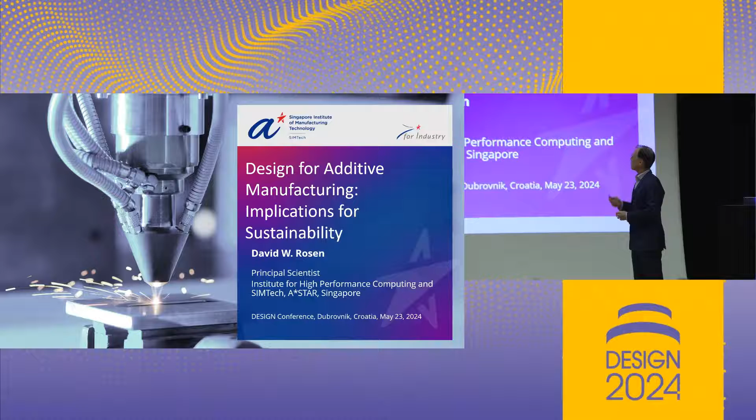As Professor Wartzack said, I'm actually in Singapore. Well, I'll get to that in a minute. And yes, I spent most of my career as a mechanical engineering professor at Georgia Tech.

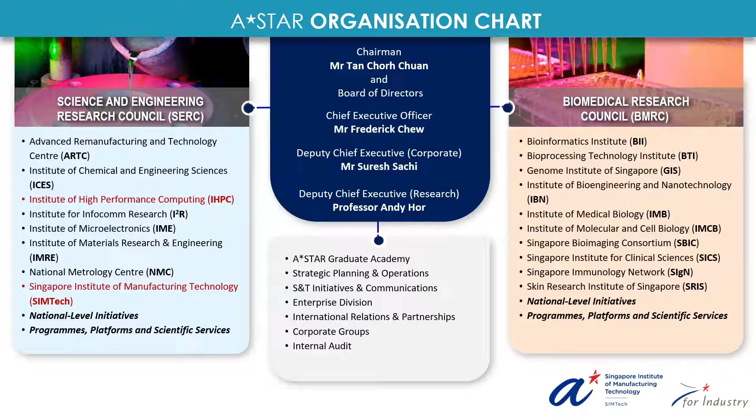So a little bit of background on what is this Singapore A-Star thing. A-Star is the Agency for Science, Technology, and Research. It's basically the national labs of Singapore. So it's very broad - Science and Engineering Research Council, Biomedical Research Council. Just to give you a little perspective, there's about 5.5 million people in Singapore, a fairly small island, and there's about 4,500 technical people that work at A-Star.

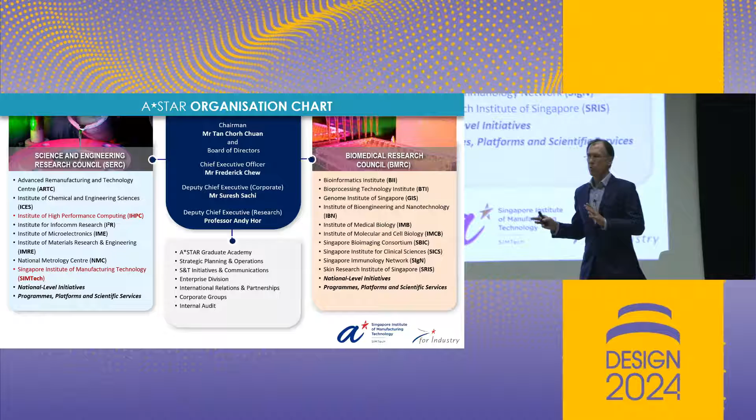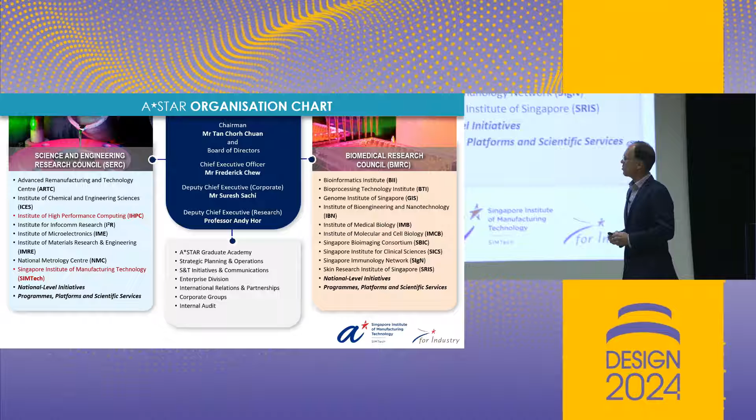So in Singapore, they take research very, very seriously, and there's lots of support. I'm part of 2 of the 18 institutes in A-Star, IHPC and SimTech. There's roughly 450 or so technical people in each of those.

So what I'll talk about today is design for additive manufacturing. It's great to see several sessions here at the conference on design for additive. Last time I attended the design conference physically in 2018, I'm not sure that there were any. There's really good growth and interest in this topic. The other topic that's really grown a lot here at the conference is AI and large language models, but I will not mention either of those topics in the rest of my talk.

So we'll talk about design for additive, give a bit of an introduction. We'll expand that to the process chain. Then I want to tie a lot of this design for additive stuff to sustainability, that's one of the themes of the conference. And then, time permitting, I'll say a few words about product architecture, design, and 4D printing.

Just to provide a good foundation for everyone - additive manufacturing or 3D printing represents a class of 7 categories of processes. They're all listed here, I won't go through them in detail, but they're all based upon the principle of layer-wise adding and processing material to build up parts. They all share that characteristic. They vary in terms of the material type, how the material is processed, and things like that. But broadly, that is the class of processes.

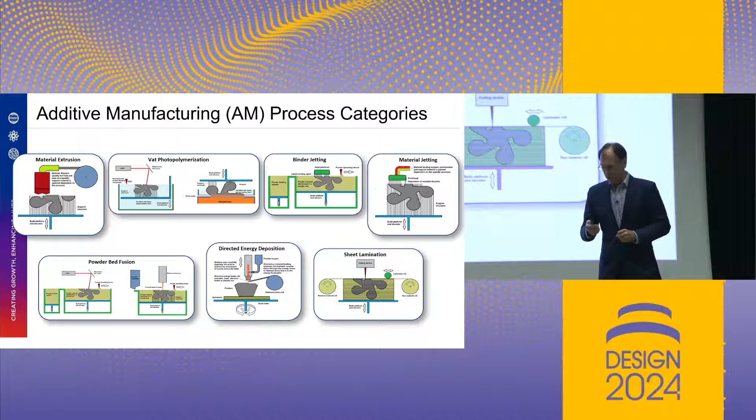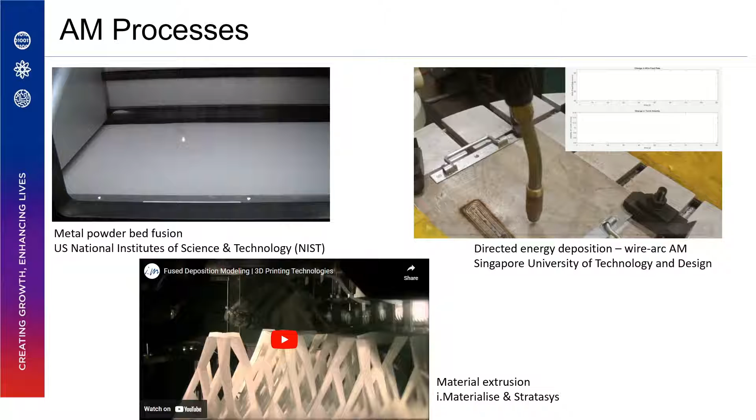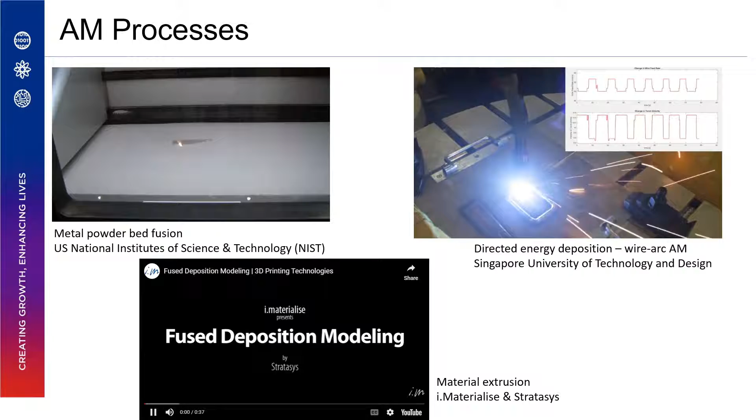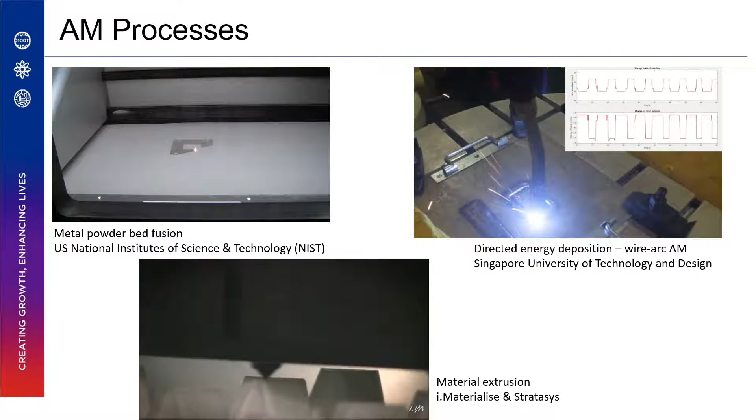Just to provide a little bit more grounding, I've got videos of 3 different processes here: metal powder bed fusion up there, and let me see if I can start these other ones. Metal directed energy deposition up here uses essentially a welding head on a robot arm. And then what many of you know as 3D printing, or Stratasys' FDM, is the deposition of thermoplastic polymer filament, basically, to build up parts. So laser processing, thermal processing of polymers, and a variety of other kinds of approaches are used.

The thing that sets apart design for additive manufacturing from design for manufacturing is basically there's an opportunity to really make use of the unique characteristics of additive manufacturing in a way that's not so apparent with conventional manufacturing processes. I'll say a little bit more about that.

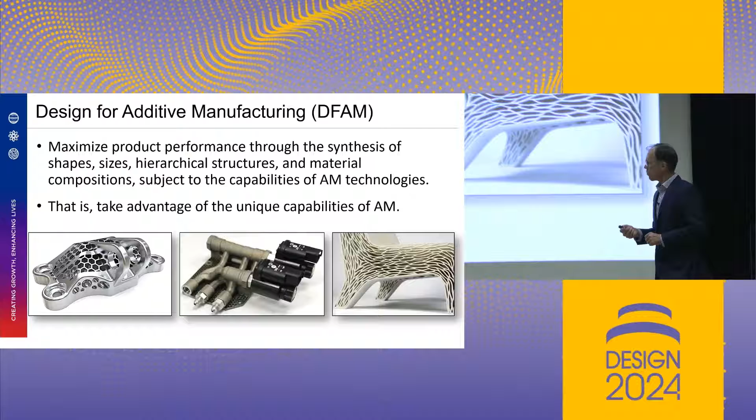My definition of design for additive is to try to maximize product performance through the synthesis of shapes, sizes, material composition, microstructures, and things like that—really take advantage of the unique capabilities of additive. Yes, we have to deal with the limitations of the processes, but let's really emphasize what the opportunities are.

What are the unique characteristics of additive? Well, they're listed here. Shape complexity is the most obvious one. If you're laser processing the material, the laser doesn't care how complicated the part cross-section is, it'll draw it. Likewise, if you're extruding thermoplastic filament, you can extrude it in virtually any shape that you want.

Material complexity—a lot of these processes will support multi-material processing, so parts can be made of more than one material, and we can also functionally grade materials or mechanical properties.

Hierarchical complexity basically means features can have features, so we can texture or put texture on surfaces, or we can have lattice structures composed of lattice structures and things like that.

And then functional complexity is the idea of building mechanisms or working devices right in the vat or in the machine, illustrated by this example, which is the elevator in a stereolithography machine, where there were about 6 or 7 different metal components that were inserted into the liquid resin vat, and the rest of the structure was built around them. Plus there are some kinematic joints here, so the elevator slides up and down on a couple of shafts, and there's other stuff we built in there.

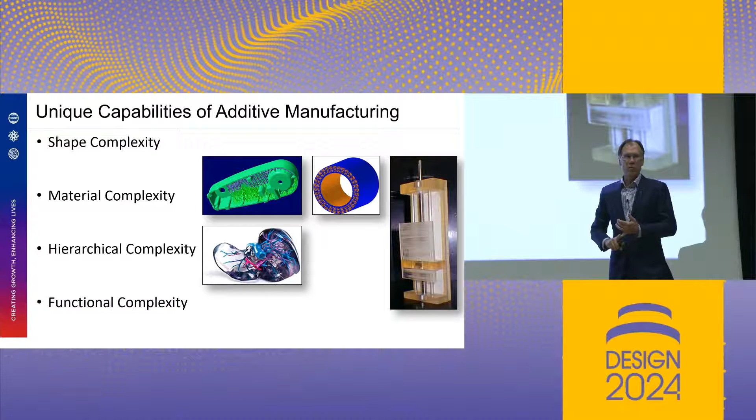But the point is simply that you can get working mechanisms if you can get the material out of the joints and support structure out of the joints, things like that. You can also embed, in some cases, motors, actuators, printed circuit boards, and things like that right into the machine and build around them to make functional devices.

People have been really creative about taking advantage of these unique capabilities to do really amazing things. I've got a mix of technical artifacts here, as well as some other non-technical things. The fashion industry, jewelry—people have been amazingly creative in what they've done.

The American football helmet shown here is a really good example of taking advantage of shape complexity capability to make custom designed parts. This is a spinal implant from Stryker, again taking advantage of shape complexity capability. Hearing aid shells, Invisalign aligners—custom designed devices where 1 million of those invisible aligners will be produced per month. You can't do that using other manufacturing processes.

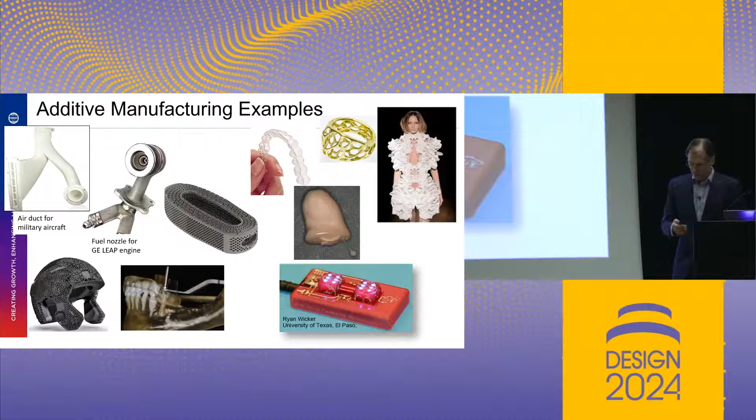So if we think a bit broadly and try to collect everything together, we can come to this distinction again between conventional design for manufacturing and design for additive. In conventional design for manufacturing, what that usually means is let's understand all the limitations of the manufacturing process and figure out how to design around them. And in that respect, what designers are doing is really tweaking, for the most part, details.

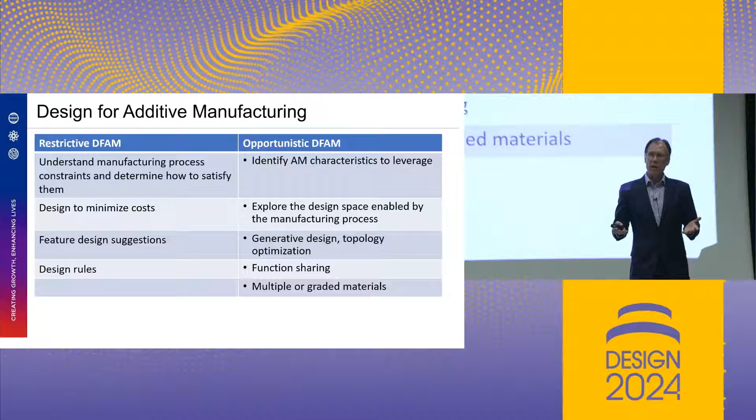Designing for injection molding—what draft angle should I use? What radius should I use on sharp corners to round the corners? Things like that, so design guidelines along those lines—do this, don't do that kind of design rules. And then there's also feature dimensioning sorts of design guidance. In other words, if you want to design snap fits, these are the kind of dimensions that you should use—again, focus mostly on the design details.

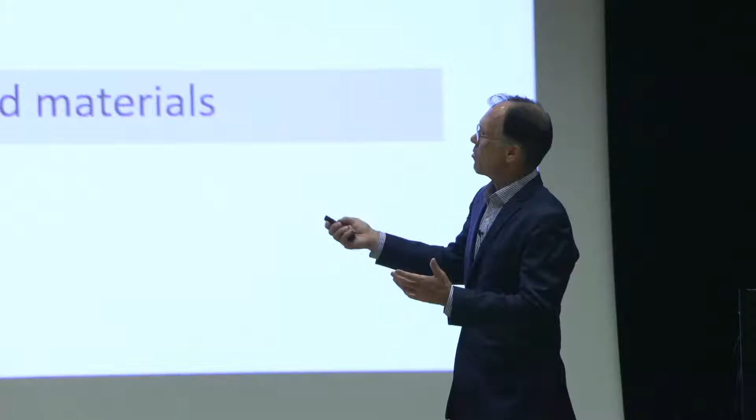That's what I call restrictive design for manufacturing, or design for additive manufacturing. The opportunistic design for additive is what I think is much more interesting and is really the distinguishing characteristic here. Because we have shape complexity, material complexity, functional complexity, etc., there's a lot of new things that we can do. And really the challenge for the designer is to figure out how to take advantage of these unique capabilities to solve their problem in ways that haven't been explored before.

I use this fuel manifold example from Olaf Diegel as an example. You don't get that design by tweaking the details on your conventional 'let me gun drill from a block of metal' kind of approach to a fuel manifold. This is a clean sheet design. You've got to think in terms of designing for additive to get that sort of a result, okay?

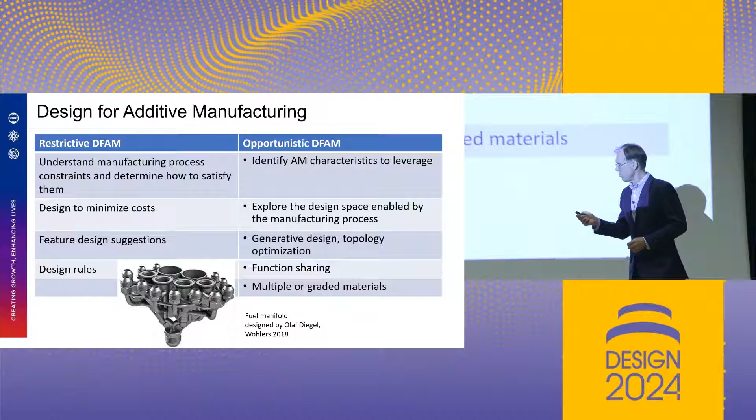In terms of the design opportunities, we can categorize them as complex geometry, custom geometry, multiple materials, and no tooling. And there's a number of consequences for each one of these things.

One of the big advantages that a lot of people talk about is part consolidation. So you can replace 4 or 5 injection molded components with one additive polymer component, or 10 metal parts that are welded and brazed together with one metal powder bed fusion part, things like that.

That's really important, but there's a lot of other advantages here. When we think about part consolidation, you're eliminating tooling. You don't have to design and fabricate tools like injection molds. You don't have assembly operations either, so you don't have to worry about assembly tooling. And if you are really effective, the performance of your integrated device can be a lot better than modules or components built of several different conventionally manufactured components.

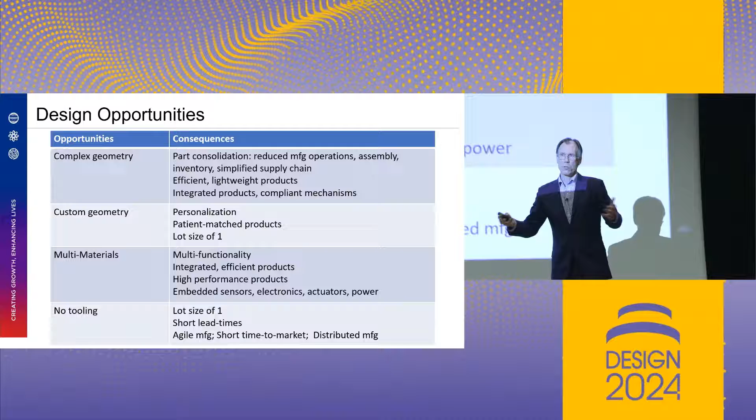Since no tooling is required, lot sizes of 1 are possible, with short lead times. Again, you don't design and manufacture tooling, but that also enables you to do distributed manufacturing. You're not reliant on a central facility where you've invested all that tooling, so you can manufacture locally, on street corners and things like that.

There's a lot of things I could have talked about, a lot of good research and results, but let me move on and say that design for the additive process itself is necessary, but not sufficient. Because most production parts are not the result of one manufacturing process. If you look at metal powder bed fusion, or metal additive manufacturing in general, there are a lot of additional steps. You really have to design for the entire manufacturing process chain, because your end result is the sum of all of these different pieces.

So with metal additive, typically you do a heat treatment of some kind, you've got to remove support structure, and you probably want to do some overall finishing, or at least finish machining of your important surfaces. The structure of that process chain is important — what processes are in it.

The sequencing is important as well, because there are implications for changing the order here. If you remove support structure before you heat treat, your part's probably going to deform a lot. If you heat treat right on the build plate without removing supports, you're probably going to maintain the desired shape a lot longer, get that stress relief, remove residual stresses, and get a better result. The point simply is that you've got to design the entire process chain and the part — they all have to be compatible.

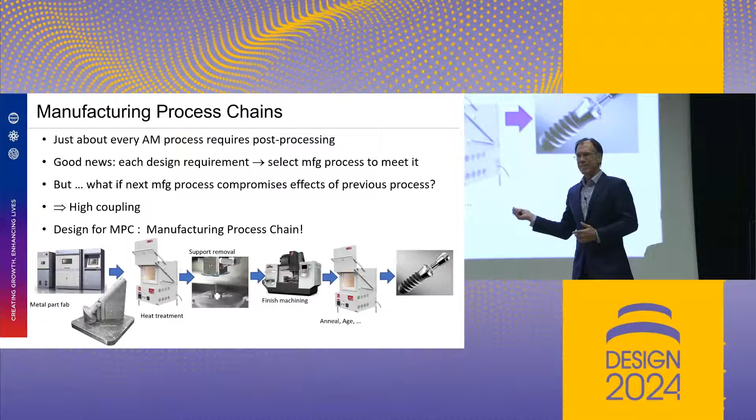That's a lot of work, but you also have incredible design freedoms in each step along the way. Just to illustrate that, this is a project that was actually done in one of my graduate classes at Georgia Tech a few years ago, to redesign a bike stem, the thing that holds the handlebars onto the frame.

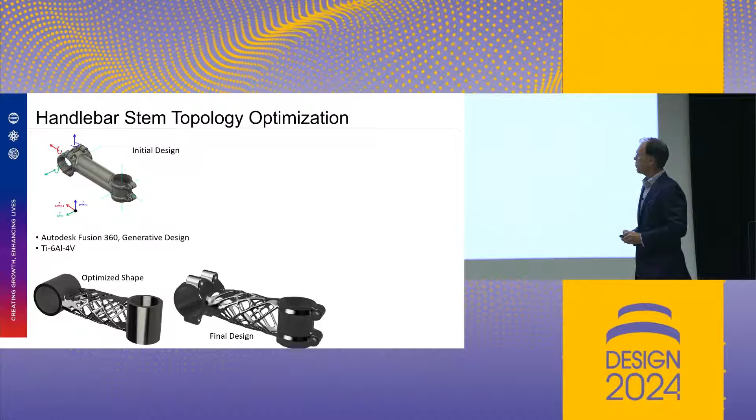We'll assume this is Ti 6-4. We have some loading conditions, and the students did generative design using Fusion 360 and generated that optimized shape. That's not the final design — there was still a lot more work to be done. That's the final design, and they did a really good job going through lots of details.

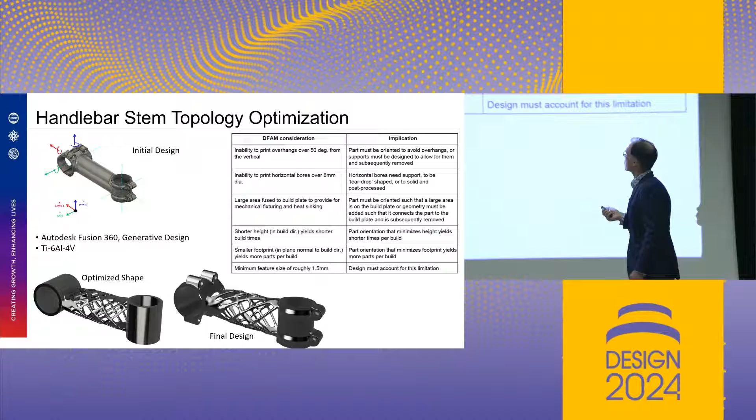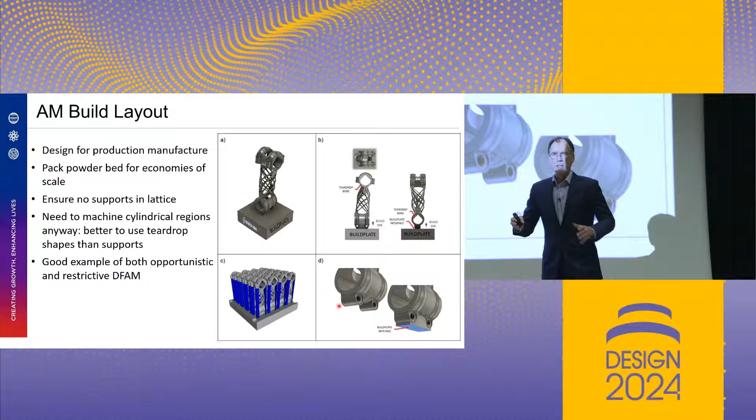So they did the opportunistic design, the generative design, and then they did a lot of really good restrictive DFAM as well. I won't go through all the details, but a big part of what they did is say, all right, we're designing this lightweight, stiff bike stem, and we're going to assume production manufacturing. What that means is we want to make as many parts in the build chamber as possible, so let's orient the parts vertically so we can put a lot in the powder bed. But if we do that, it has implications on the part design.

What we don't want to do is, in the lattice structure, have support structures holding each of these little struts in place. So all of those struts have to be self-supporting. All of the struts had to be tweaked a little bit, and rounds were added everywhere, things like that.

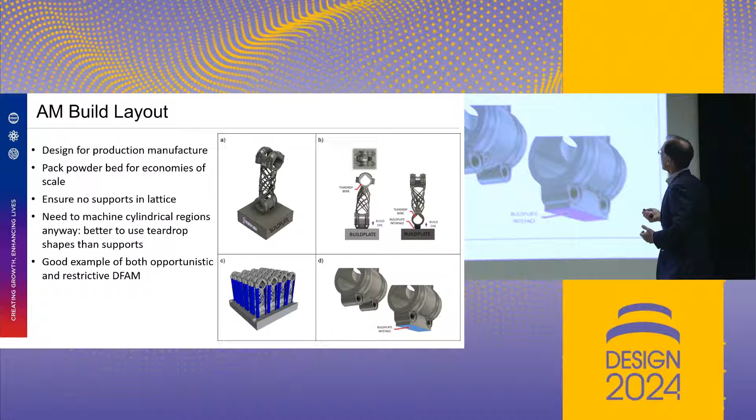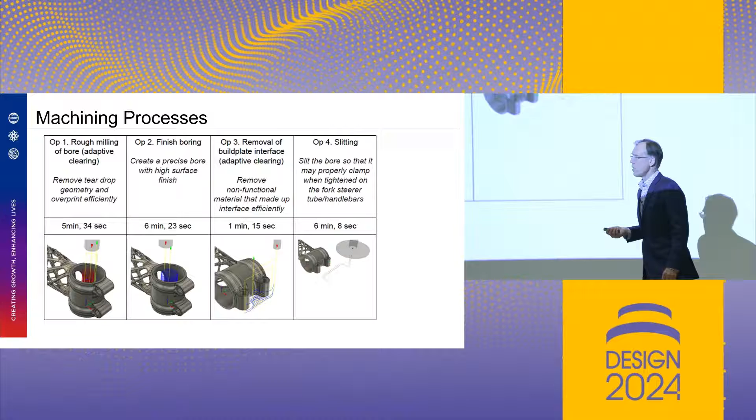Then they made some other design decisions based upon minimizing support structure. These purple and blue things are the support structure supporting the overhangs here. They also made decisions about using teardrop shapes in the big cylindrical areas — those surfaces had to be machined anyway, with tight surface finish requirements because of the mating surfaces. All of these things were considered. These students also knew a lot about machining, so they did detailed machining process planning and simulation, and determined machining times and build times so they could estimate overall part costs.

So they really did a good job of putting that manufacturing process chain together and designing each and every step along the way. Okay, this is a type of construct here that I call a process chain map. It basically relates design requirements to the different steps in the process chain.

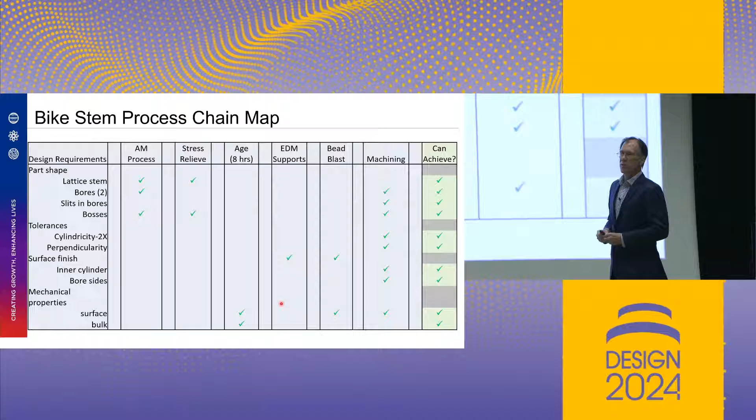The green check marks indicate which process affects which design requirement. And so what you want to see is all green checks on the right-hand side. If you don't, then that means you've got to make some adjustment in your process chain.

All right, so that's kind of an overview of that idea of design for the additive manufacturing process chain. Now when we want to tie that to some of the technical design and technical design research, we can take a look at the structure of that process chain and say, for this design problem, I have a bunch of technical requirements, functional requirements I have to meet, and then I want the manufacturing processes to be fast, less expensive, but give me a good enough result. And so that, to me, sounds like a multi-objective design optimization problem.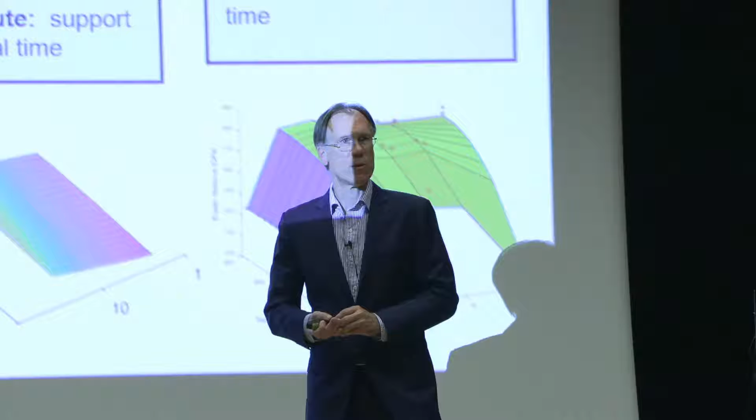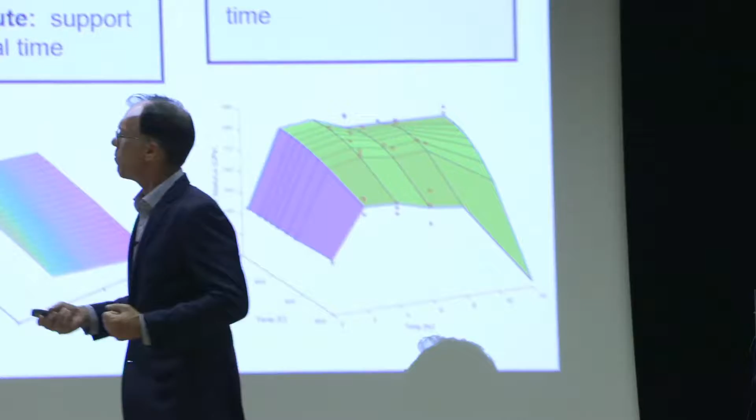And so we can actually use multidisciplinary design optimization, MDO techniques here to formulate and solve a large, comprehensive, integrated design problem where we can decompose the overall part process chain design problem into a functional part design sub-problem, powder bed fusion process design, heat treatment process design, finished machining or support removal process design, and finished machining. We can use surrogate models and stuff like that for each of these.

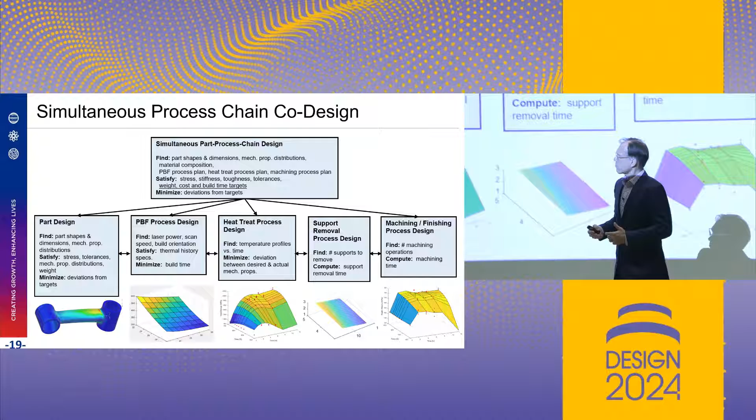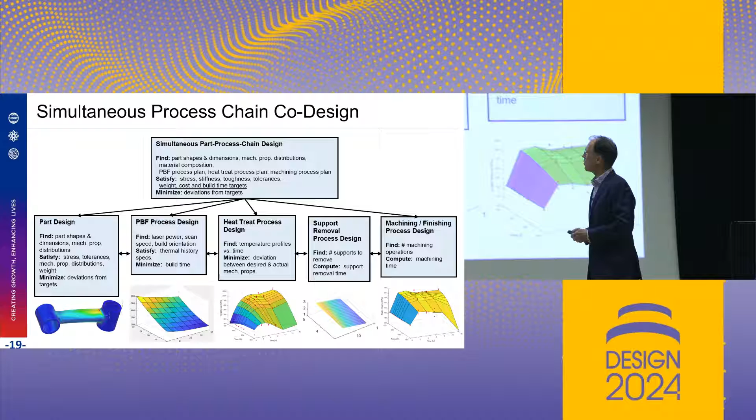But the point is that we can start with this sort of abstract idea of design for the manufacturing process chain and actually apply very good, well-developed design theory and methodology kind of tools here. We've done this for a few different examples.

One is that bike stem. I'll just do size optimization, not with the lattice structure and stuff like that, just to illustrate that we can explore that design space defined by, in this case, we had three objectives: deflection or stiffness, build time, and then part weight or part volume.

And then explore all the different combinations of the implications of those three objectives. And because we have three objectives, we can draw a ternary diagram like this, where blue indicates low overall objective function values, red indicates high. And then we can sample the design space here, and we find that point A up at the top in that blue area, blue is supposed to be good, right? But it's really an infeasible design, and much of the rest of the design space looks like this.

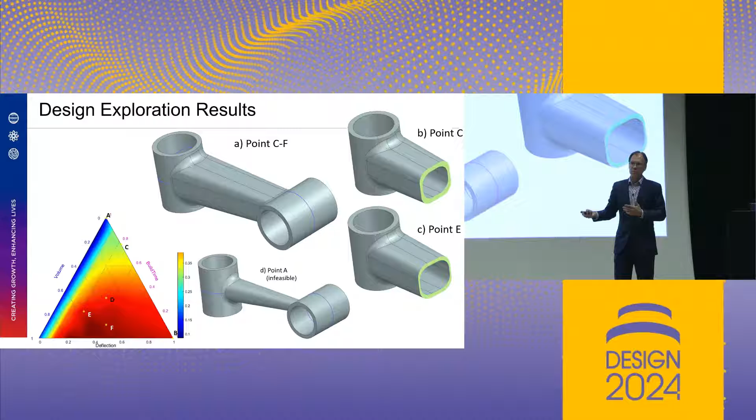So the overall, or the outside shape is pretty much constant. We want to minimize deflection, maximize stiffness, so it's a pretty big cross-section. But the overall cross-sections inside vary a lot as we go from, for example, point C down to E and F down here. The point simply is you can start with that overall design for the manufacturing process chain kind of problem formulation, apply MDO methods, and then do design exploration and optimization from there.

Okay, now on to sustainability considerations. I was fortunate to be part of a group that recently published a paper in Nature Sustainability on a vision for sustainable additive manufacturing. A great group of co-authors here, and I'd like a special shout out to our fearless leader, Serena, who really drove the development of this paper and the development of the ideas. So thank you, Serena.

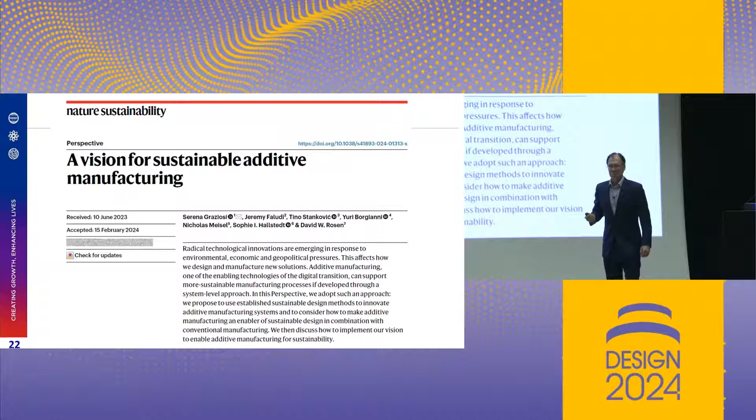So some of the ideas here, I'll go through just a set of bullet items that are sort of common statements about additive manufacturing and sustainability. Some are supportable and some are not quite. So the first one is: AM eliminates manufacturing waste.

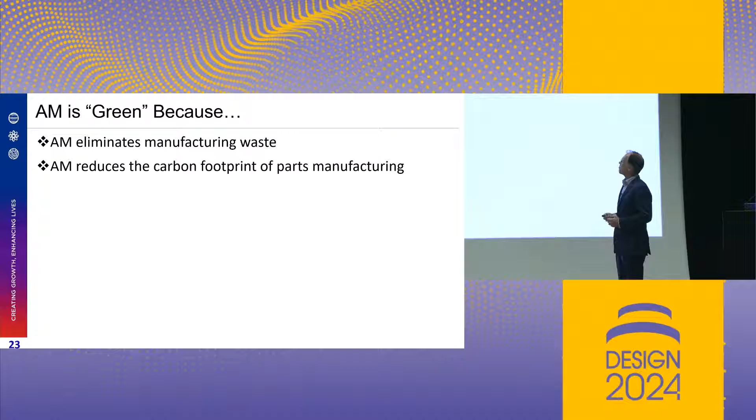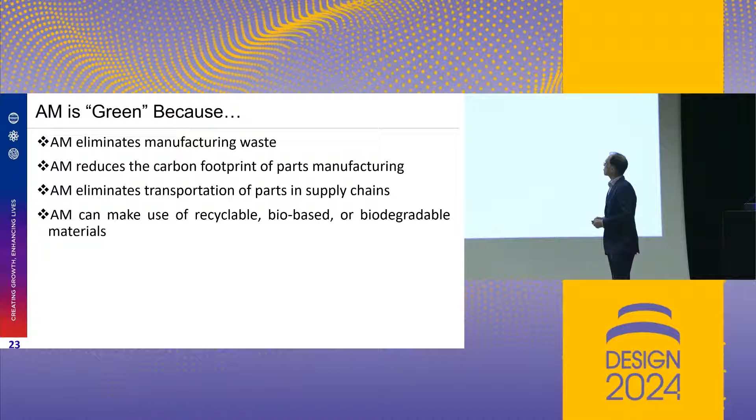AM reduces the carbon footprint of parts manufacturing. AM eliminates transportation of parts in supply chains. AM can make use of recyclable, bio-based, or biodegradable materials. AM enables lightweight parts. AM enables significant part count reduction, that part consolidation I talked about earlier. No tooling, fewer manufacturing and assembly operations. And finally, AM enables part repair and refurbishment.

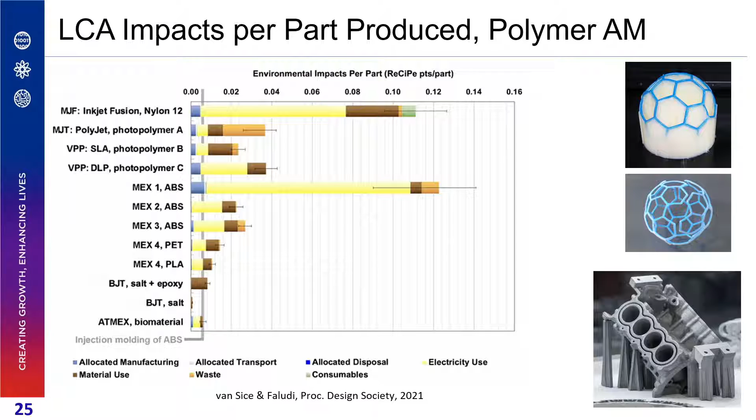I won't go through all the details here, but what you see in the middle, MEX, it's material extrusion or 3D printing, with two different materials. For the same process, different materials, maybe different printers, the energy usage is completely different. And in fact, this is really unacceptable.

There's no reason a material extrusion machine should use that much energy. But if you just take a look at, it reduces carbon footprint, right? Well, yeah, no, not in all cases, right?

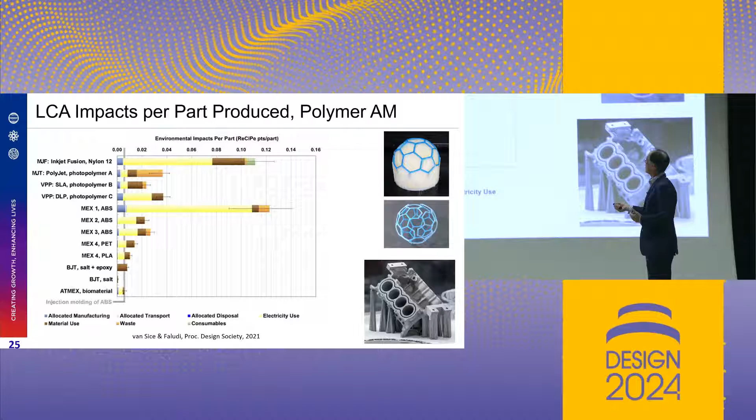Another kind of example, and this is for metal parts here: carbon footprint per kilogram of material processed is actually maybe not such a good measure. But again, highly variable.

Casting, extrusion, roll forming, wire drawing, conventional processes, the bars aren't so long. We start going down here to metal additive manufacturing, and we see that, well, no, the carbon footprint per kilogram of material processed is actually really significant.

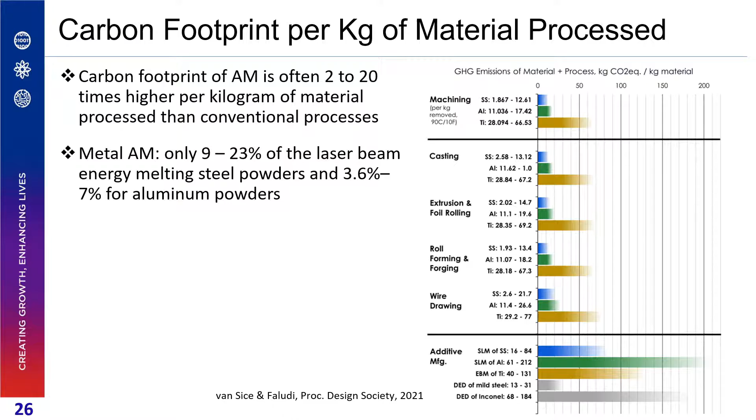And in large part, that's because the lasers used in these machines are not very efficient. Back when I started in the mid-90s, lasers were 1% to 2% efficient in terms of power out versus power in. Now they're 25%, a huge improvement in laser technology, but still maybe not enough.

The big bar here is for aluminum. Aluminum is a real shiny material. Lasers don't couple well with aluminum powder.

The other thing to consider is powder is incredibly energy intensive to produce. So atomizers melt and then atomize essentially metal.

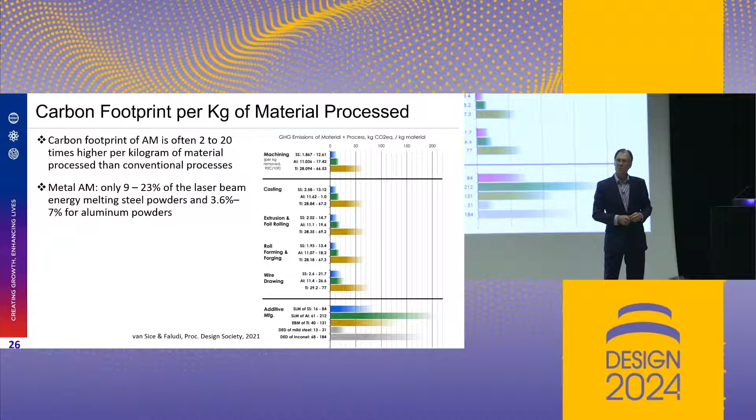Just think about the process here, right? You're casting large ingots of metal. You're then shipping them to a facility that has atomizers. You're remelting all that metal and then generating powder with it, and then capturing it and sieving it. The whole process doesn't make a lot of sense, but regardless.

Now when we look at the real positive side and some of the really creative solutions that people have developed, I really like this example of a solar-powered sand printer. This is a master's student at the Royal College of Art in London who came up with the idea of using solar power, so a solar power collector, and powder bed fusion, so this is a vat of sand powder, and it takes the solar energy, makes a beam out of it, and then rasters the beam in the top layer of the sand bed to produce essentially a glass part.

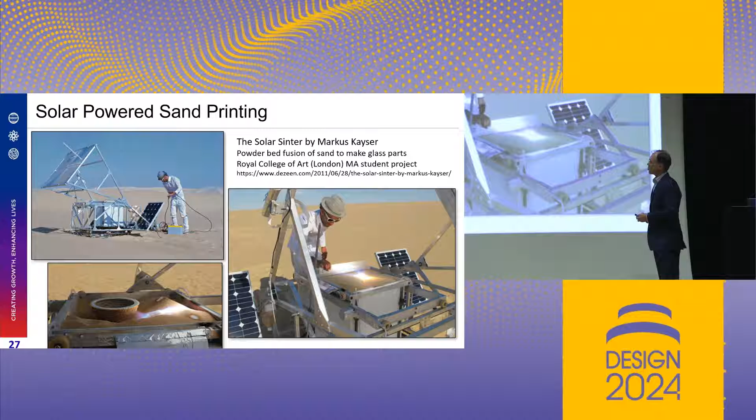Okay, very low carbon footprint here, right? Other people have been really creative about material development. So we see salt shakers made from salt up here. This filament is actually made from wine, or it's actually grape skins.

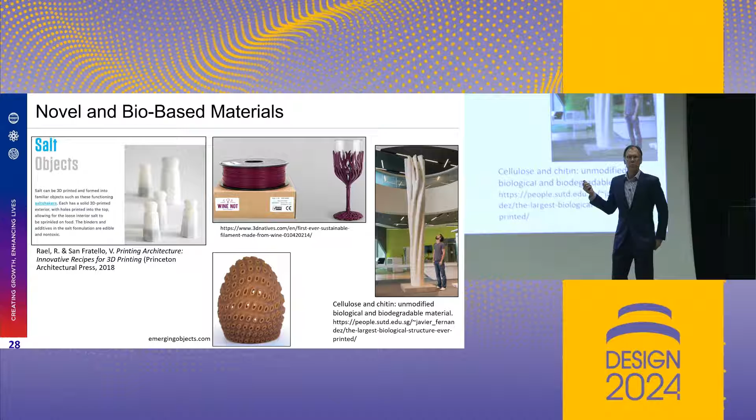This sample over here was 3D printed at Singapore University of Technology and Design. It's composed of cellulose and chitin, so bio-based, biodegradable sort of material, and that really is about 5 meters tall. So a very good material, very good opportunities for developing new, much more sustainable kinds of materials.

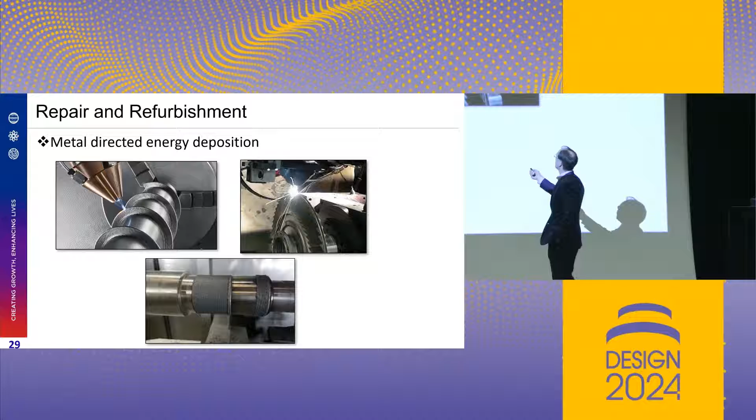Another one of the bullet items there was AM can be used for repair, refurbishment, and things like that. Well, directed energy deposition processes are used probably more for repair than they are for part fabrication. This just illustrates a few different examples of depositing a millimeter or two of metal material onto a worn part of various kinds. You see shaft applications here, or a bladed disc kind of application as well.

So in our paper, we provide a series of statements or proposals for how AM can be made more sustainable. And again, like a lot of things, if you try to tweak the machines or the processes or the materials a little bit, you're really not going to make big changes. But if you think more systematically and more systemically, you can make really, really big impacts here.

So look for opportunities to design for part repair, design for upgradability, refurbishment, remanufacturing, things like that. Look for opportunities to not use conventional high carbon footprint sorts of materials, but opportunities like I just showed with biodegradable or bio-based materials, and designing for recycling. And again, always design to take advantage of AM's unique capabilities.

We provide this overall sort of idea about an ideal scenario that covers everything from the raw materials, whether it's bio-based or biodegradable, or coming up with a new way. I'll get out of the way, you can take pictures. Coming up with a new way to make metal powder would have a huge impact as well.

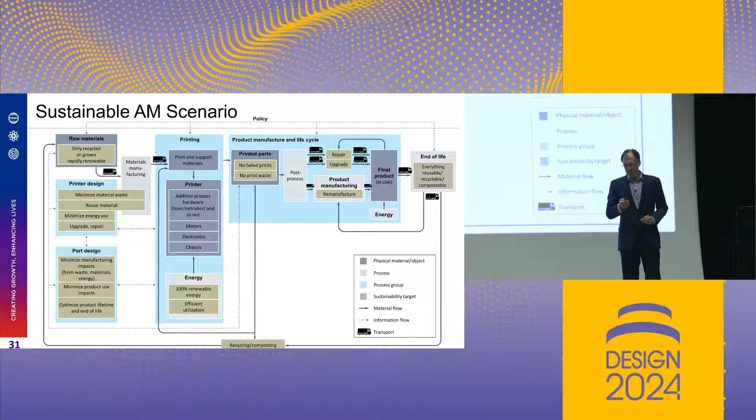Remember one of the bullet items was, hey, AM eliminates part transportation costs. All of the trucks in that schematic indicate something is being transported. So again, not exactly. But again, we have the scenario here, you can take a look and study it further.

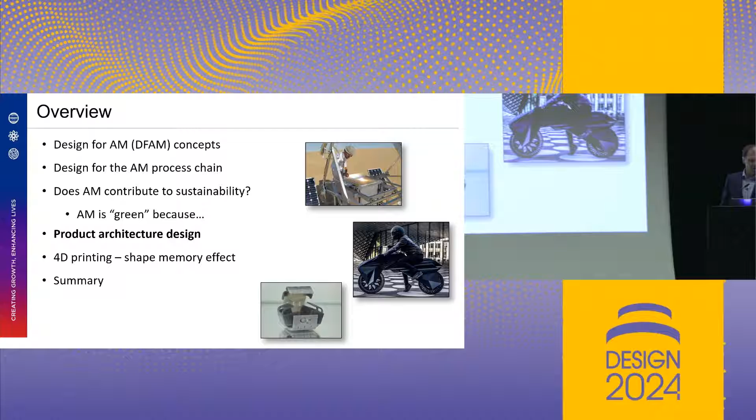Okay, I am probably running out of time a little bit. I don't know, how are we doing on time?

Okay, no one cares. Great. I'm going to keep talking.

Now I've got two more topics here, I'll go through them fairly quickly. I've said repeatedly, we want to take advantage of unique capabilities, and what's key is to look for changes in part design and product design that can have a huge impact. To me, the thing that really has a huge impact is product architecture design, as indicated by this e-bike, this motorcycle. But first, a real extreme example.

GE, and in particular GE Aerospace, has been one of the leaders in designing for metal additive manufacturing. As a demonstration, they redesigned this turboprop engine. There's a conventional design, and here's their additive manufactured design. They claim to go from about 850 parts down to 11 — that's an order of magnitude in part reduction.

This isn't just applying the Boothroyd-Dewhurst design for assembly guidance of, well, if two parts are connected, they're the same material, and they're not moving relative to one another, you can maybe consolidate them. You can't just apply that and get an order of magnitude decrease in part count. You've got to really do clean sheet design, and that's what GE did.

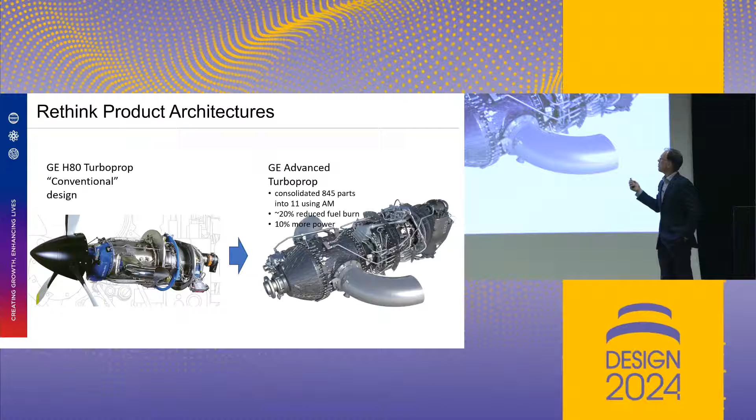So they not only can really greatly simplify the factory floor, they get better performance and probably longer life, things like that.

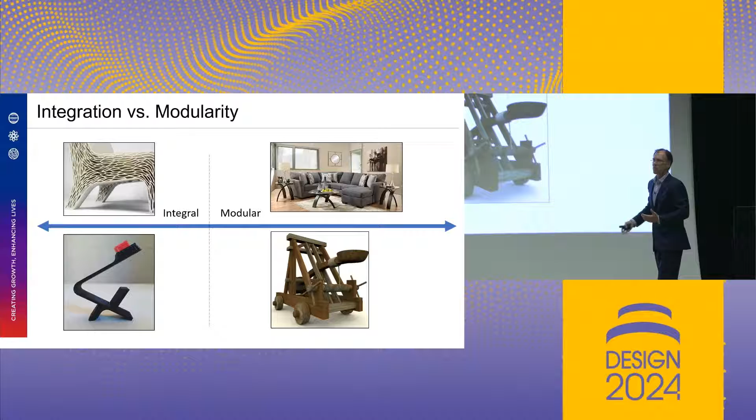Of course, central to product architecture design is this idea of am I modular, am I integral, where on that spectrum are we. There's a role for both, but I would argue that in terms of applying additive manufacturing, if you have a modular architecture, each of your modules could be highly integrated and very efficient from a part count perspective.

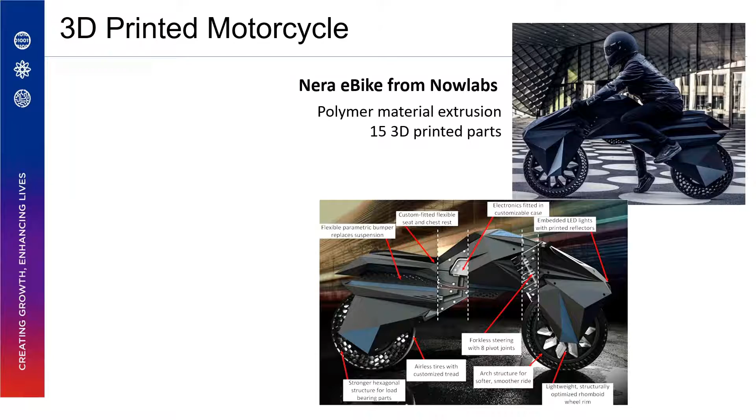A little bit more about this 3D printed motorcycle. This is an e-bike, electric motor-powered motorcycle. A couple things that are really novel about this: it consists of 15 3D printed parts, and that includes the tires, wheels, seat, frame, everything — well, everything except the electric motor, the battery, and the control electronics. But everything else is 3D printed, and when I say 3D printed, I mean thermoplastic material extrusion kind of 3D printed.

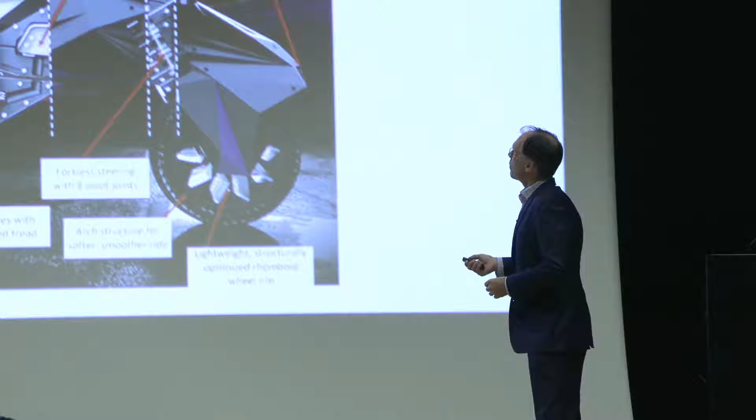One thing to notice about this: this is a hinge that allows you to steer — it's not a spring, it's not part of the suspension. In fact, there are no suspension components in here whatsoever. But you get a suspension function because you have elastomer wheels, with honeycomb structures for the elastomer tires and honeycomb structures in the wheels. You have this flexible bumper, basically a honeycomb structure that will flex underneath the seat, and the seat is elastomer as well. Plus the whole frame is carbon fiber reinforced ABS, so it does have some flex as well.

If you can eliminate entire subsystems, like suspension subsystems, you're changing the product architecture radically, and you can get tremendous part consolidation.

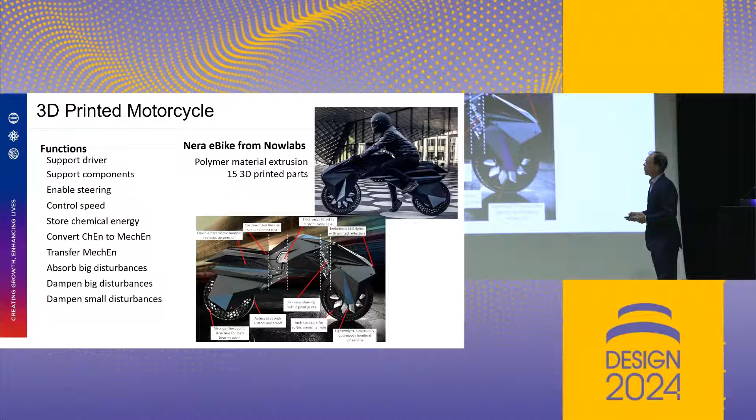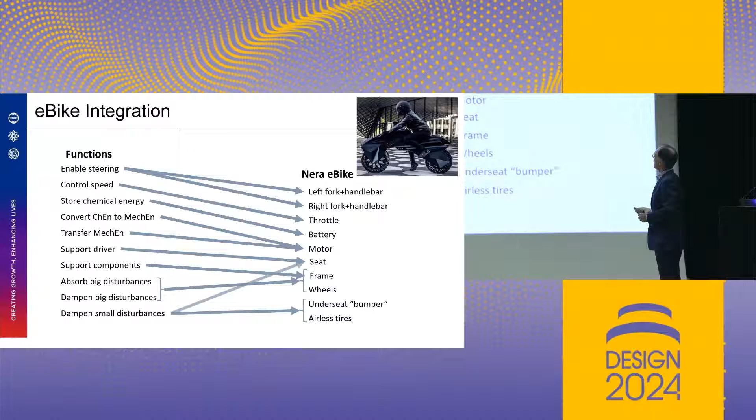From an engineering research or design research perspective, we can go back, look at the functions, look at the relationship between function and form, where modules come from, and then look for opportunities for function sharing and function integration. So we did just that, listed the functions out, listed the different components. I won't go through all the details here.

So suspension gets replaced, and we get some function sharing. In the overall architecture, there's no separate handlebar from the fork, from the steering mechanism — they actually did left and right sides, so the left handlebar is connected to the left fork, and there's a hinge in between. So some novel design components, and then going from a gas-powered motor to an electric motor, you get some function integration — you don't need a separate transmission and things like that.

So tremendous differences in architectures between conventional and this specially designed e-bike.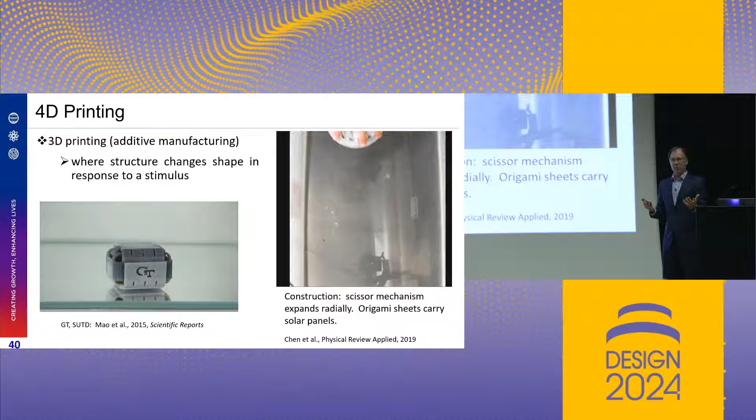And then this example, one of my favorite examples, Christina, thanks for sharing it, even though you didn't know you shared it with me. This is a solar panel deployment mechanism where the scissor mechanisms along the outside are shape memory polymer things that actuate to go from a folded to an extended configuration. And that opens up an origami interior where the actual solar panels are mounted.

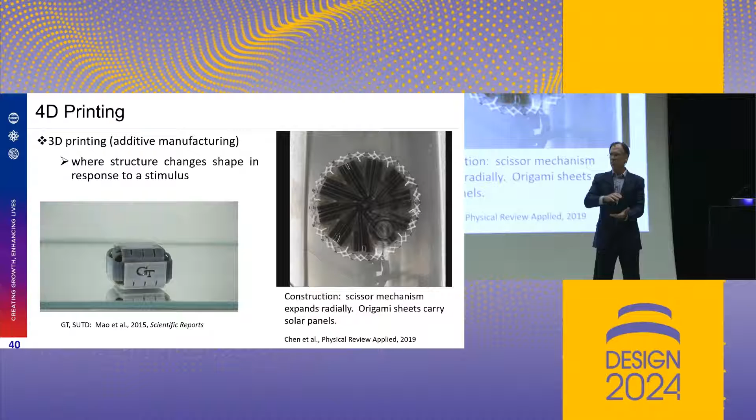So just two different examples, sort of two ends of the spectrum in terms of complexity, but this is the idea. If we go back to this one, the box started out printed flat. So you could print that flat, print out 1,000 of them, ship them all stacked up, and then where they are needed, you put them in, or you heat them up, it actuates the shape memory effect, and they fold up into the desired shape.

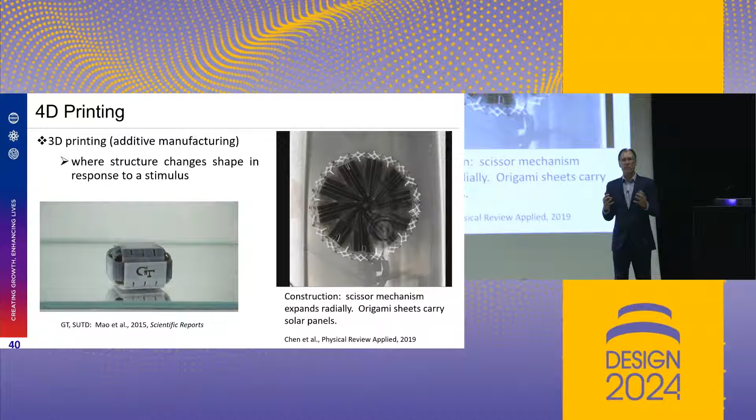Solar panels, those go on satellites. You need something very, very compact to launch, and then you want it to deploy. So it's that sort of idea.

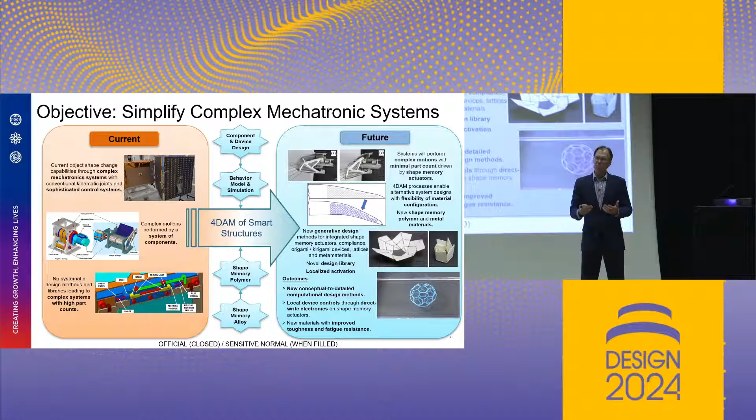I've talked a lot about product architecture design and part consolidation. Additive manufacturing has had a huge impact on designing structures or structural components. With 4D printing, utilizing the shape memory effect, we're actually designing actuators into our structure. If you think about conventional mechatronic devices, there are servo motors, bearings, shafts, bushings, set screws and lots of different components. If we can replace those with shape memory hinges, we have a tremendous simplification of the design.

Tremendous part consolidation. So long term, the future is 4D printing is going to do for mechatronic devices what 3D printing has done for structures. That's my prediction. Take it with a grain of salt if you want, but we'll see if it comes true.

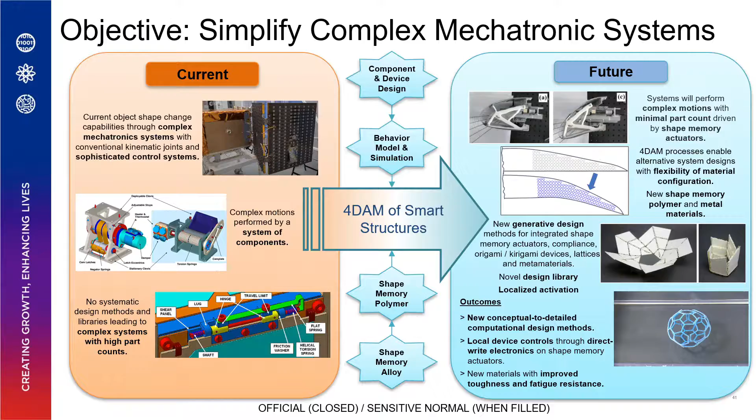And then finally, when you look at the 4D printing or shape memory device literature, you see very simple components for the most part. We developed this new material, we're going to print a strip of it and look at folds. Christina's example with that origami solar panel is one of the notable exceptions. But the point is there's been a whole bunch of these simple components that have been designed and engineered. We know how they behave.

If we had an overall design synthesis capability that said, here's my problem specification in terms of start with that shape, give me that shape eventually, how many different ways of combining these components might you come up with that could fulfill that requirement? One of the topics we're working on at A-STAR in Singapore is this idea of a general design method for 4D printing for morphing and deployable structures, based on a design library matching problem specifications. We'll see how all that works.

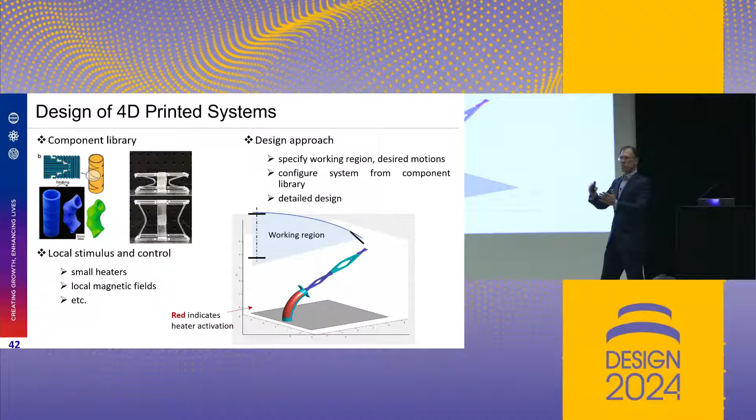So we need this thing to bend. Okay, let's use a bending cylinder. We need that stretching or that extension. Let's use a scissor mechanism to then interrogate an entire workspace in a robot arm sort of fashion.

To wrap up here, I wanted to introduce the whole idea of design for additive manufacturing, contrast that with design for manufacturing, and emphasize again that we have some unique capabilities, and the challenge to achieve the maximum benefit is to take advantage of those unique capabilities. But remember, we have to design for the entire process chain, not just one process. We took a look at the pros and cons and good and bad characteristics of AM relative to sustainability. And then I had a few words about product architecture, design, and 4D printing.

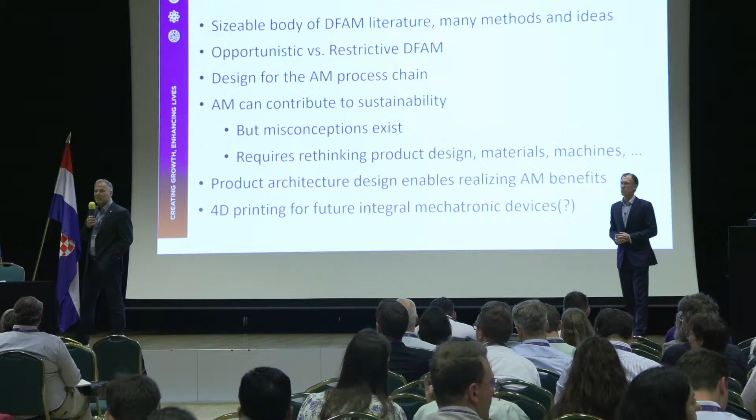Thank you very much for that wonderful presentation. I'm sure there are some questions, we'll take time for some. Okay, who's got a question please? No questions? Could not be. Come on, you know professors like questions. Don't let Serena off the hook. Yeah, Serena.

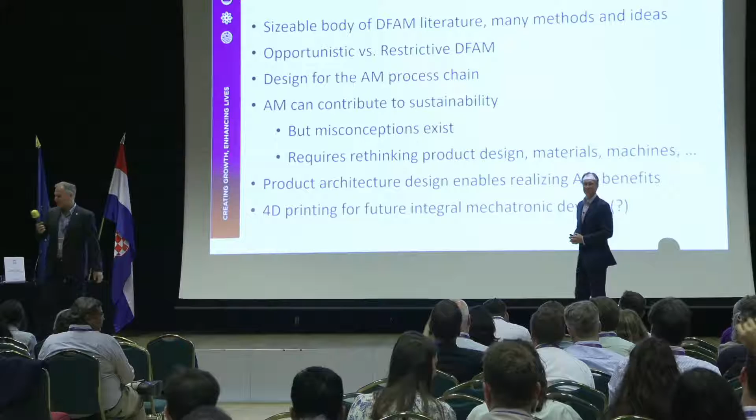Thank you for this wonderful overview and the insight you've provided us. I have maybe a tricky question for you. Is there something you have not yet seen in additive manufacturing that you would like to see developed, from a design point of view? Is there something missing in your view?

Yeah, I'll give you two quick answers. One, I want someone to come up with metal powder production that doesn't involve the conventional metal fabrication workflow, because it's highly inefficient. But the other thing I want to highlight is, let's assume we do solve that problem.

Just think about fabricating an engine block using a laser that's 100 microns in diameter. You can scan as fast as you want, it's still going to take days and days to fabricate. And at 50 to 100 euros per hour, that's more money than I have in my pocket. That's really expensive. And why isn't additive used in the automotive industry, but it is in medical and aerospace? It's because those industries are not nearly as cost sensitive.

So what we need is new technologies that allow us to fabricate entire cross sections at a time in metal. We've got to get away from one laser scanning, or ten lasers scanning. We've got to get to a million beams or something equivalent, to do what stereolithography did moving from laser scanning to DLP mask projection. We need the same kind of technology for metal additive manufacturing, and that will have a huge impact. Thank you.

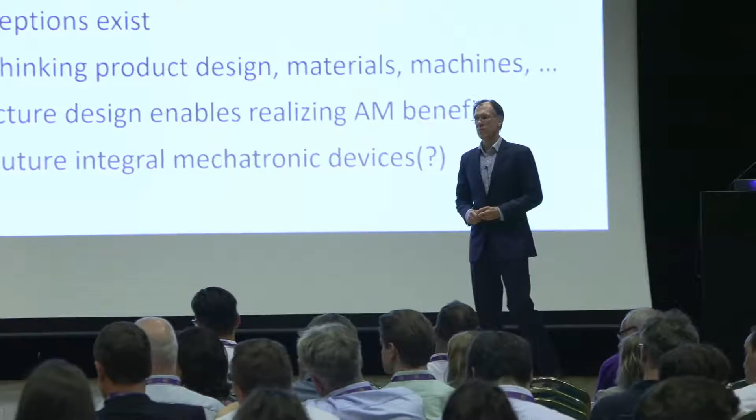Thank you, professor, for the very nice talk and the variety of things going on in this area. I was particularly interested in the 4D printing space, connected to the previous question as well. In one of your slides, you hinted that we could use magnetic fields and some mechanisms for triggering. The interesting thing about mechatronics is you have electronic control. Can you share more about what mechanisms we can use for controlling structures like this?

Sure, yeah. So as shorthand, 4D printing is shape memory effect, but we don't have to limit ourselves to just shape memory. We have residual stresses, we have shape memory effect, plus if we add electrically or magnetically active particles into the material, we can use additional fields to get improved performance. There's a whole spectrum of technologies we could bring to bear, adding these additives to get better mechanical properties, faster actuation, more repeatable actuation, more forces, and so on.

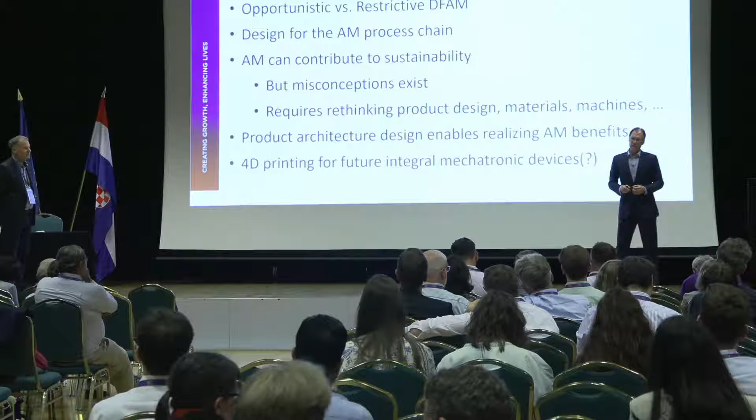We also have a controls issue here. Right now, contrast that with the examples I showed where we put the entire device into a vat of hot water and the heat actuated the shape change. We really want to be able to locally control the actuation, and maybe build sensors in there as well, so we can do feedback or closed loop control of all this. When we start adding electrically and magnetically stimulated elements, we've really complicated the whole device.

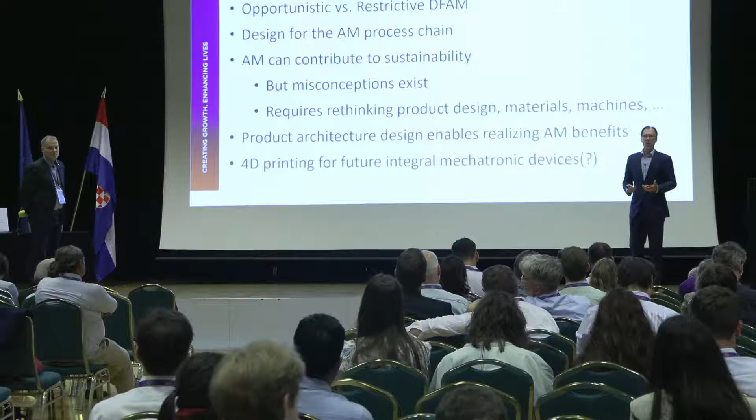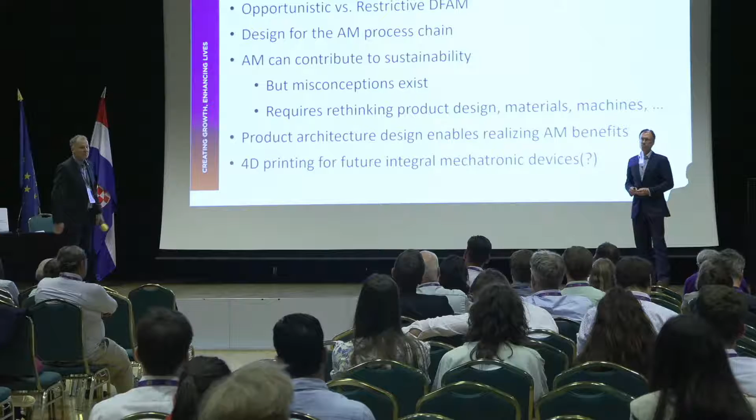So there's a trade-off there. These are all trade-offs and considerations that really have to be explored, but there's plenty of opportunity for novel design ideas to take advantage of the best aspects of these technologies, while achieving good trade-offs among the competing objectives. Okay, I think everything was absolutely clear. So again, thank you very, very much for the wonderful presentation. Thank you.